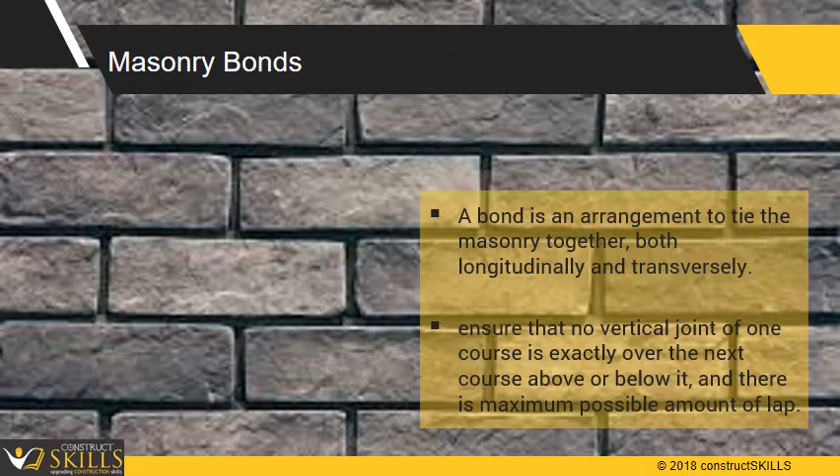Bonding provides strength and stability to the brick structure. A properly bonded wall can receive a heavy load, and will distribute the load over a large number of bricks, which in turn will distribute load over a larger area of ground.

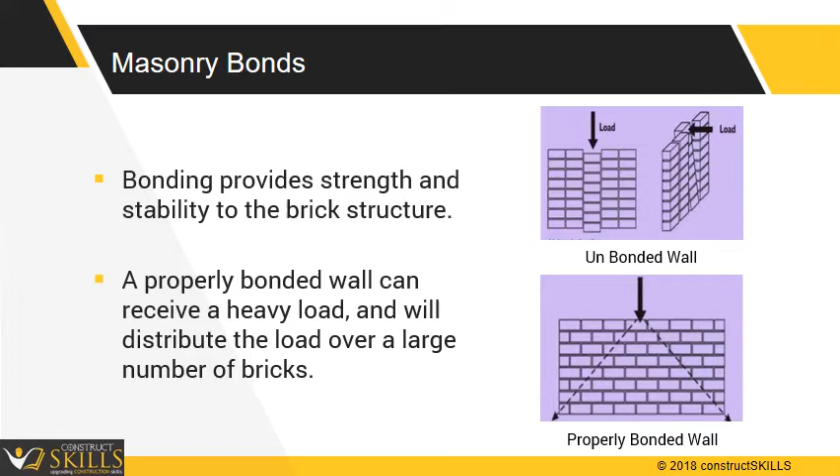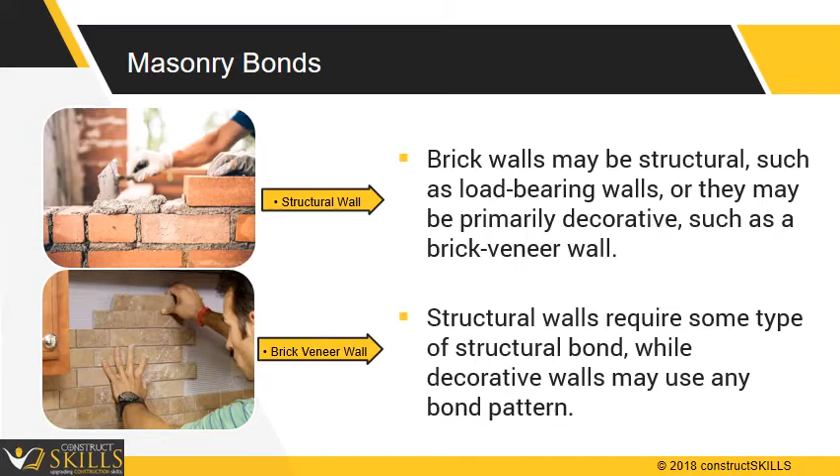Brick walls may be structural, such as load-bearing walls, or they may be primarily decorative, such as a brick veneer wall. Structural walls require some type of structural bond, while decorative walls may use any bond pattern. There are many different types of brick bonds and each has its own look, installation challenges, and structural considerations.

Following are different types of commonly used masonry bonds. 1. Stretcher bond. 2. Header bond. 3. English bond. 4. Flemish bond.

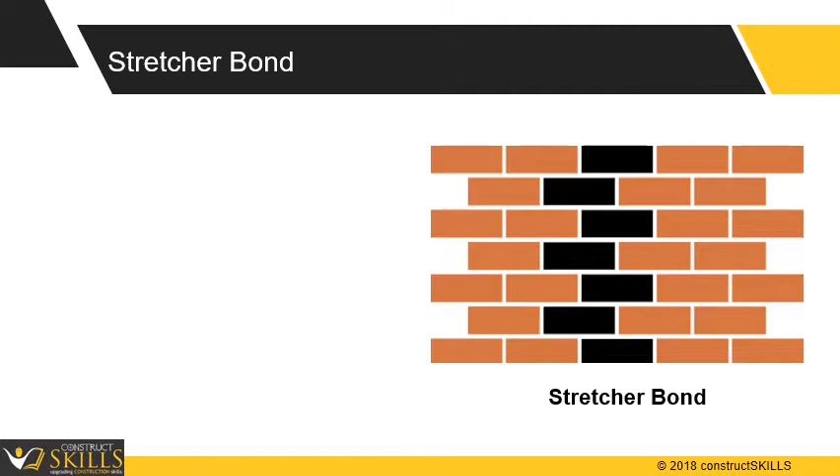Stretcher bond. It is a simple and easiest bond to work with. Bricks are staggered by half brick from the course above and below, in a classic half-bond pattern. All bricks are laid lengthwise, with the long sides facing out. Recommended for walls of half brick wide, for example, partition walls. It is used for cavity walls as less cutting is required. Ensure that no two adjacent vertical joints are in line.

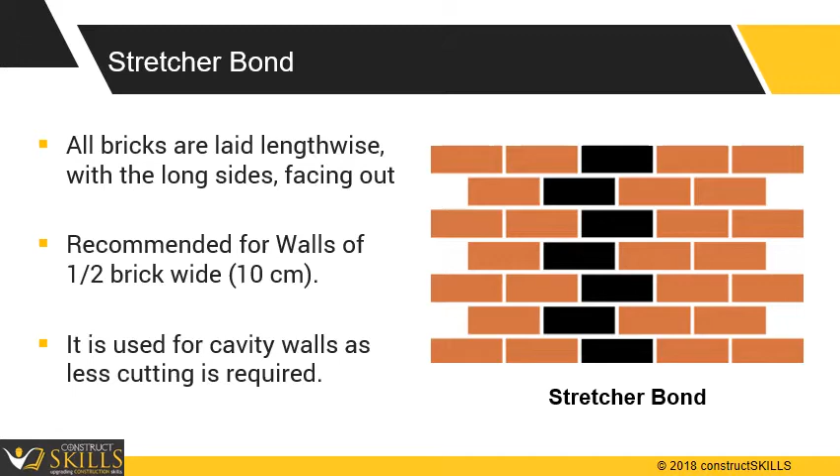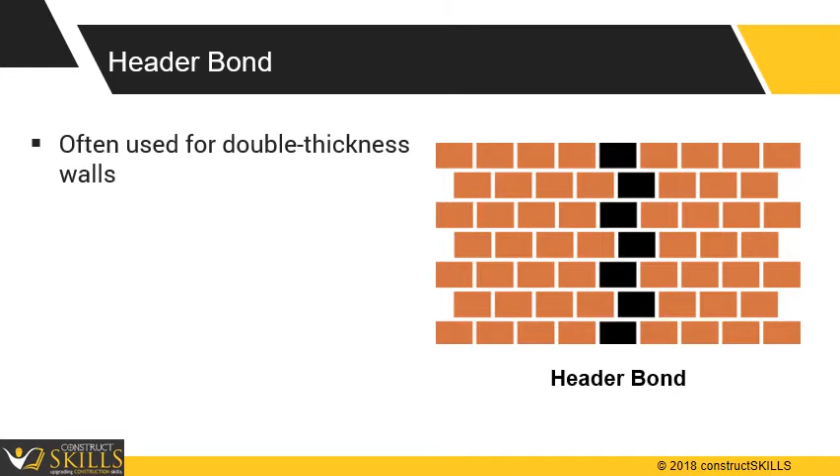Header bond. Running bond pattern with intermittent courses of bricks laid with their ends facing out. Often used for double thickness walls so that header bricks are flush on the ends with two stretchers laid side by side. It does not have the strength to transmit pressure in the direction of the wall length. It gives 23 cm thick wall with 5 cm lap in each course. It takes much more amount of bricks. It is used for architectural purpose.

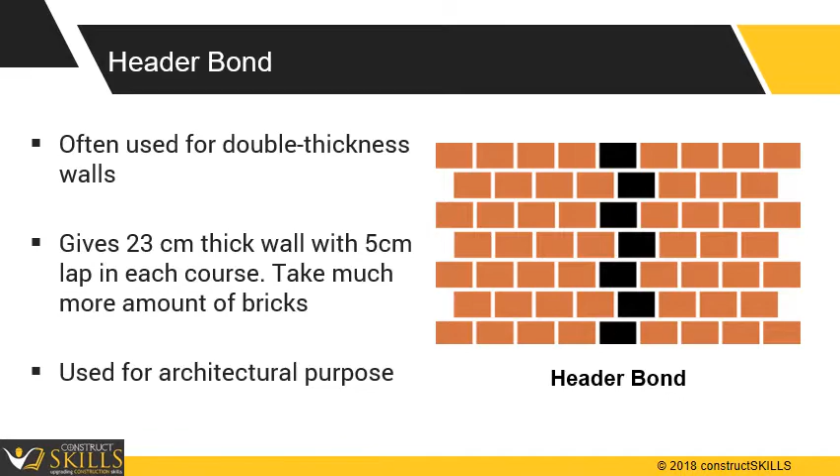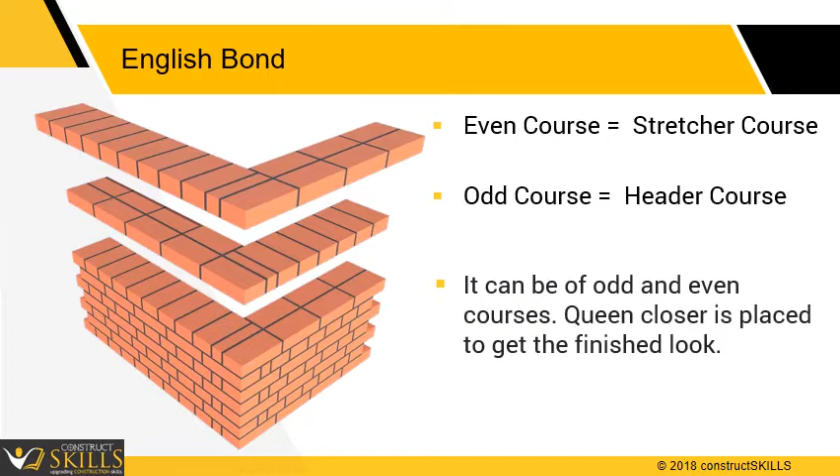English bond. In this bond, even course is laid as stretcher course, while odd course is laid as header course. English bond is easy in laying it down. It can be of odd and even courses. Queen closer is placed to get the finished look wherever required.

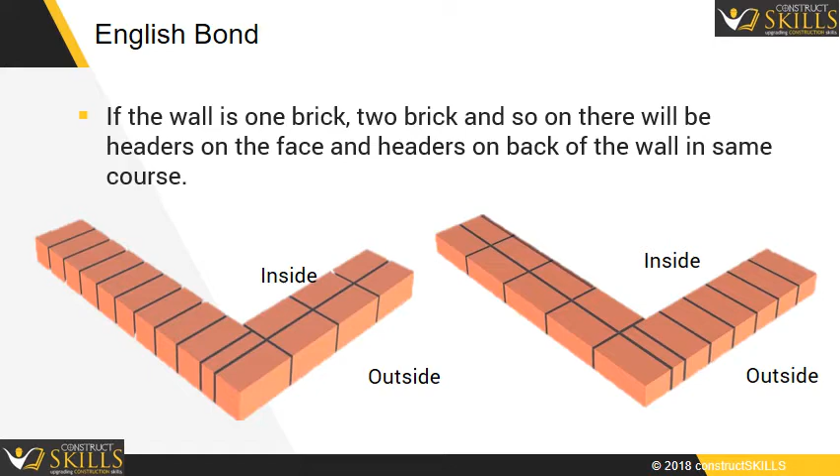If the wall is 1 brick, 2 brick and so on, there will be headers on the face and headers on back of the wall in same course. Similarly, stretchers on the face and stretchers on the back of the wall in the same course. If the thickness of wall is 1 1/2 brick and 2 1/2 brick and so on, there will be stretchers on the face and headers on the back.

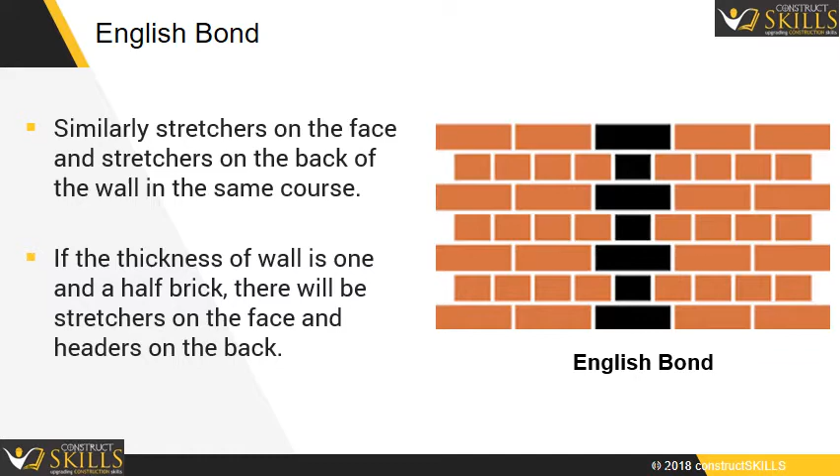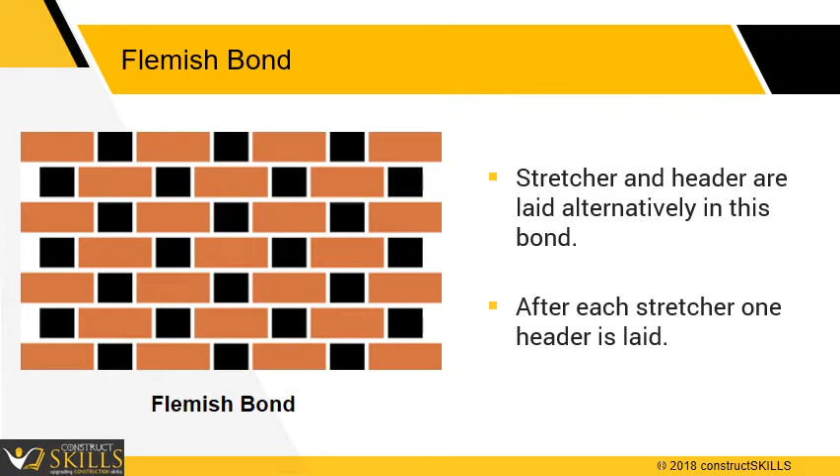Flemish bond. Stretcher and header are laid alternatively in this bond. After each stretcher, one header is laid. Larger volume of bond mortar in Flemish bond type specimen produces lower strength compared to English style bond, since mortar has lower resistance than brick units. When we need 13.5-inch wall thickness in Flemish bond, then half bats are centrally located. Large number of half bats are used in Flemish bond.

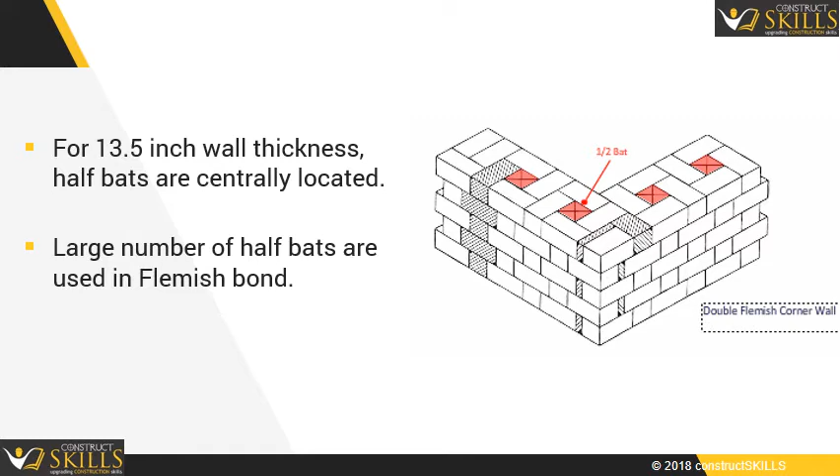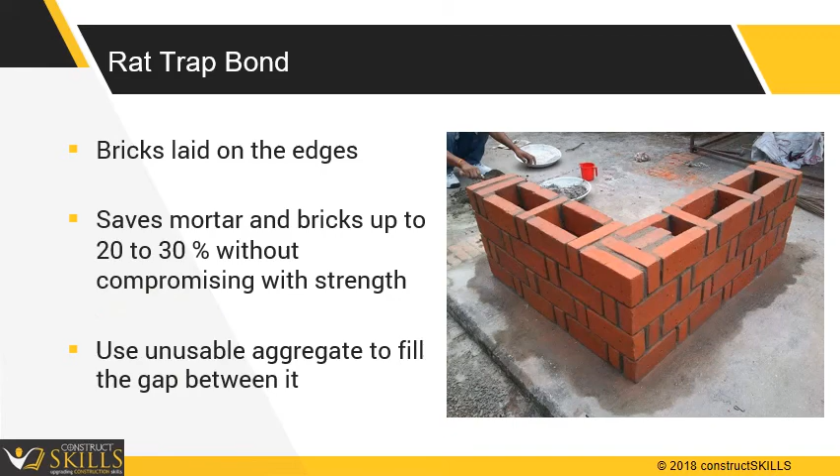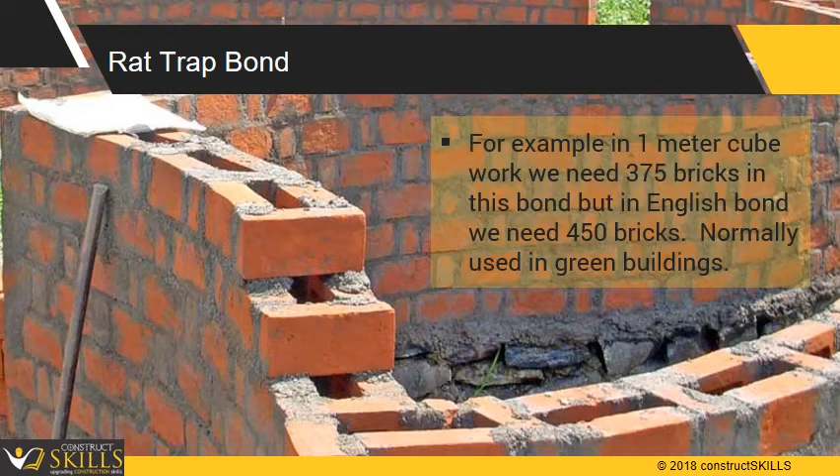Rat trap bond. In rat trap bond, bricks are laid on the edges. This saves mortar and bricks up to 20 to 30% without compromising strength. Sometimes we use unusable aggregate to fill the gap between them. For example, in 1 meter cube work, we need 375 bricks in this bond, but in English bond we need 450 bricks. Normally used in green buildings.

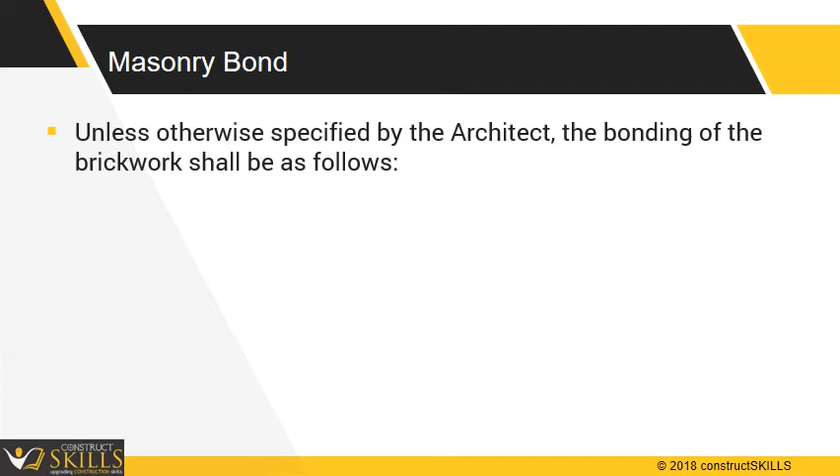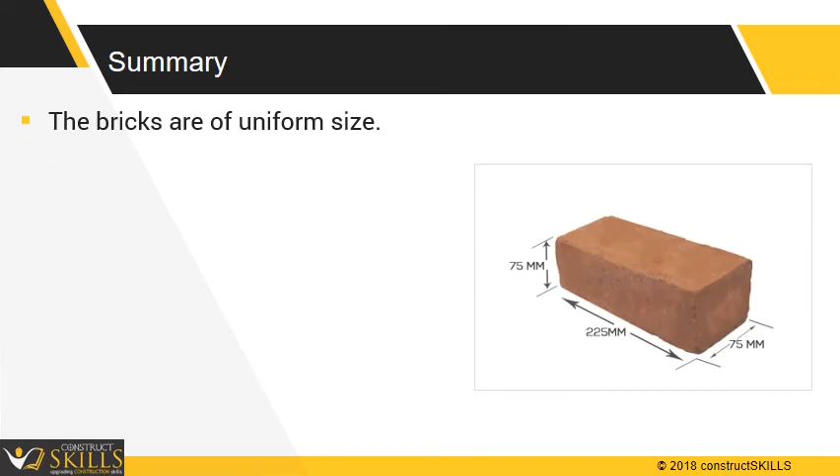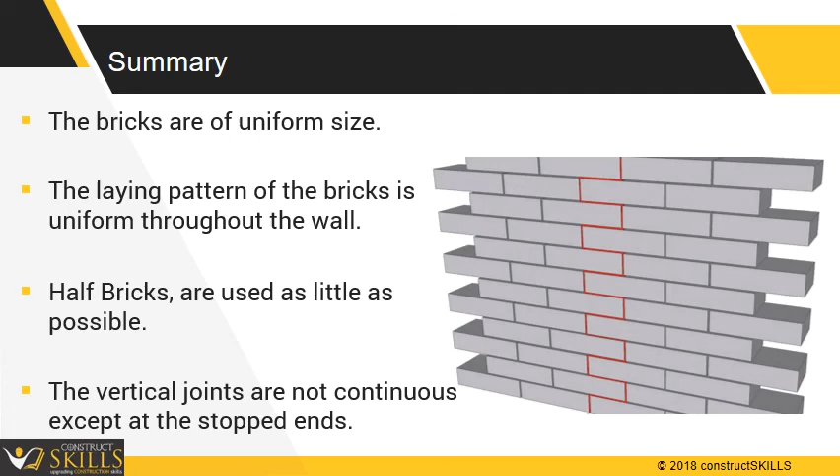Unless otherwise specified by the architect, the bonding of the brickwork shall be as follows: walls of 1 brick thickness and over, English bond. Walls of half brick thickness, stretcher bond. For obtaining a good brick bond, ensure the bricks are of uniform size. The laying pattern of the bricks is uniform throughout the wall. Half bricks are used as little as possible. The vertical joints are not continuous except at the stopped ends. The joints in every other course should be vertical over one another in alternate courses.